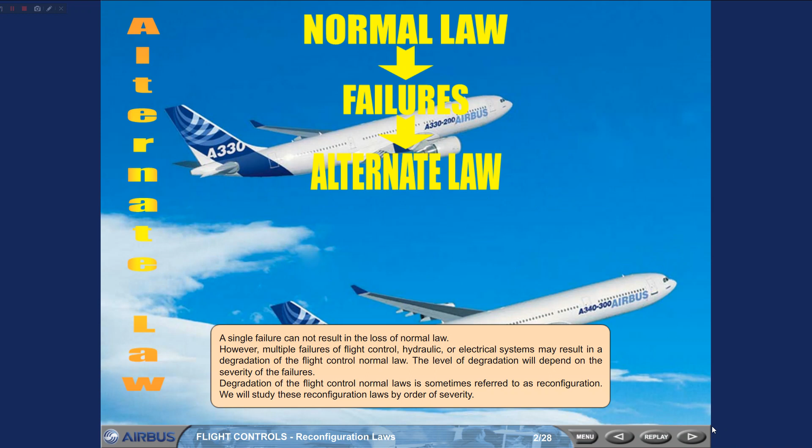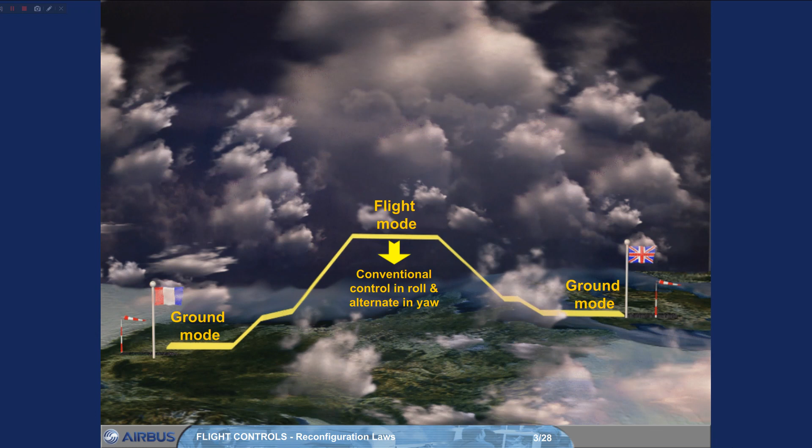In alternate law, ground mode is as in normal law. Flight mode pitch control load factor demand is as in normal law. Roll control is conventional, surface deflection is proportional to side stick deflection. Roll sensitivity is proportional to airspeed, feeling more sensitive. Yaw control turn coordination is lost, with damping available but limited authority.

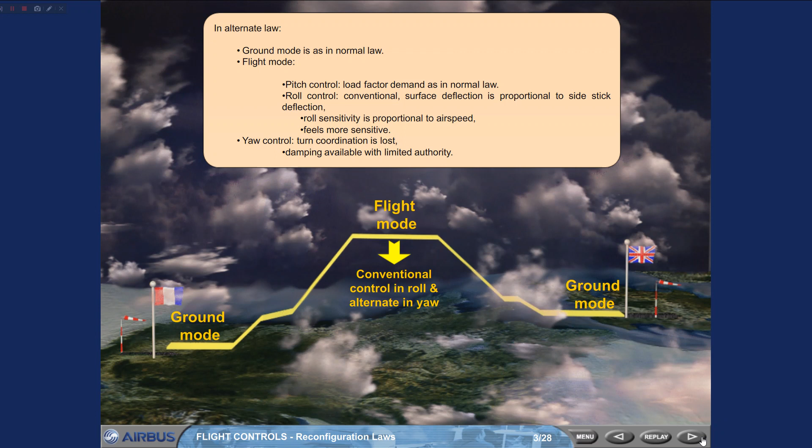Degradation to alternate law is indicated by the ECAM caution: flight control alternate law, protection lost. Under alternate law, most protections are lost. Some are replaced by stabilities. We will continue by studying the loss of protections.

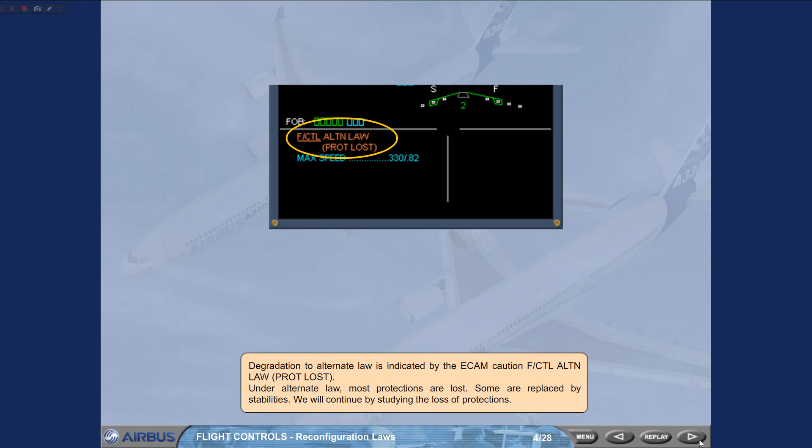Pitch attitude protection is lost, and the flight control computers will not limit the nose up or nose down pitch attitude. On the PFD, the green dashes, which mark the protection limits in normal law, are replaced by amber crosses.

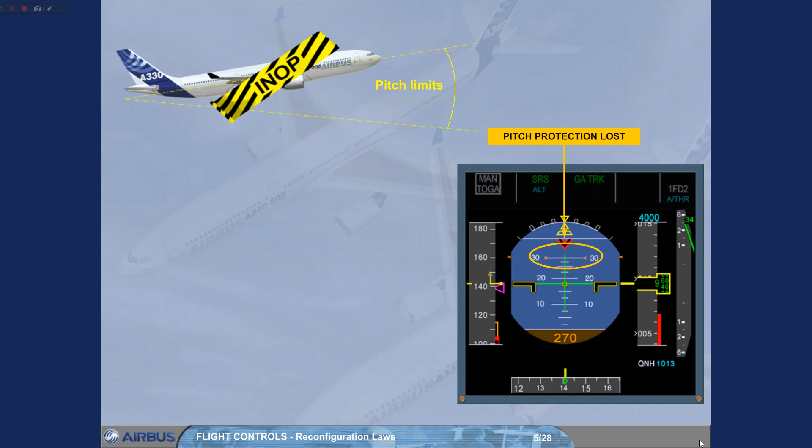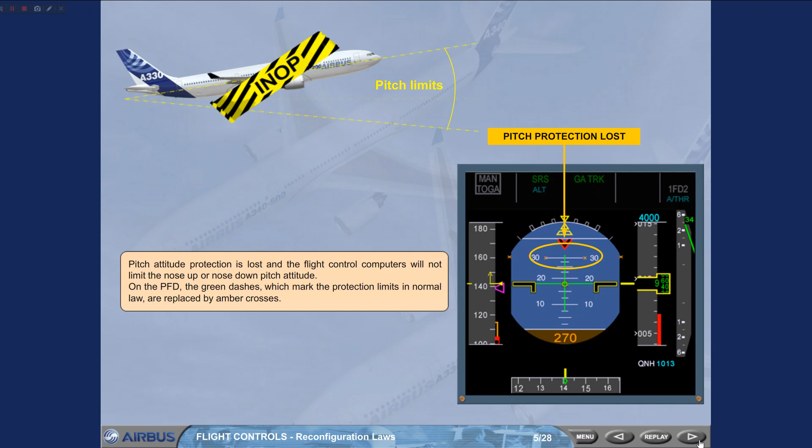Bank angle protection is lost. On the PFD, the green dashes are replaced by amber crosses. Note, if the bank angle exceeds 45 degrees, the autopilot will disconnect.

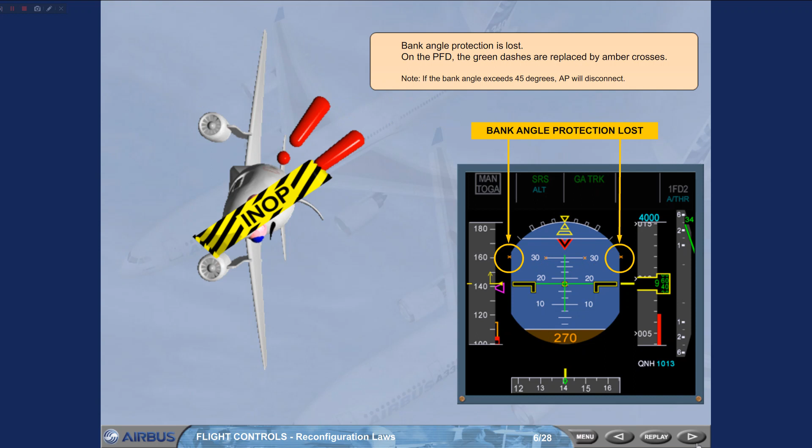The load factor limitation is similar to normal law. So we will go straight to the differences between normal and alternate law, high and low speed stability.

In alternate law, the high angle of attack protection is replaced by a low speed stability. V-alpha protection and V-alpha max are replaced by a stall warning speed, VSW, indicated by a red and black barber pole.

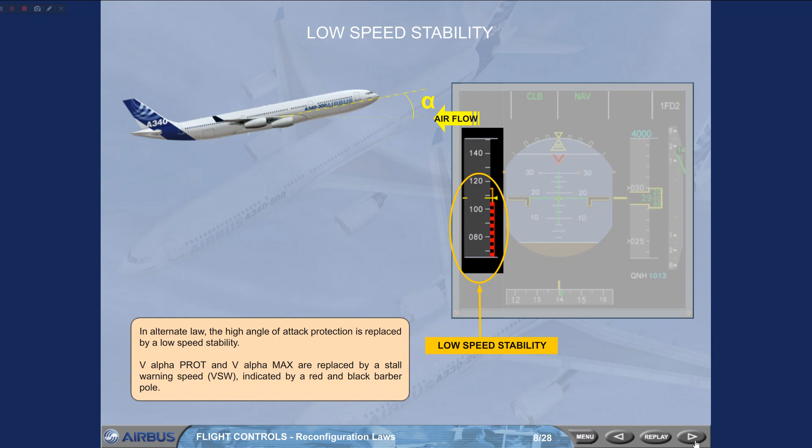As speed approaches VSW, a gentle progressive nose-down pitch input is introduced to lower the nose and prevent further speed loss. The pitch input can be overridden by pilot input on the side stick. Note, in case of failure of two ADRs, there is no low speed stability.

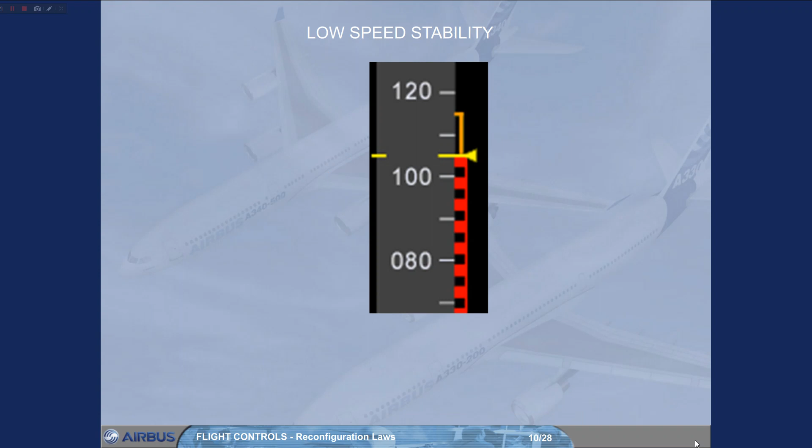At VSW, an aural stall warning is triggered. The aircraft will stall if the warning is ignored. Alpha floor protection is inoperative in alternate law.

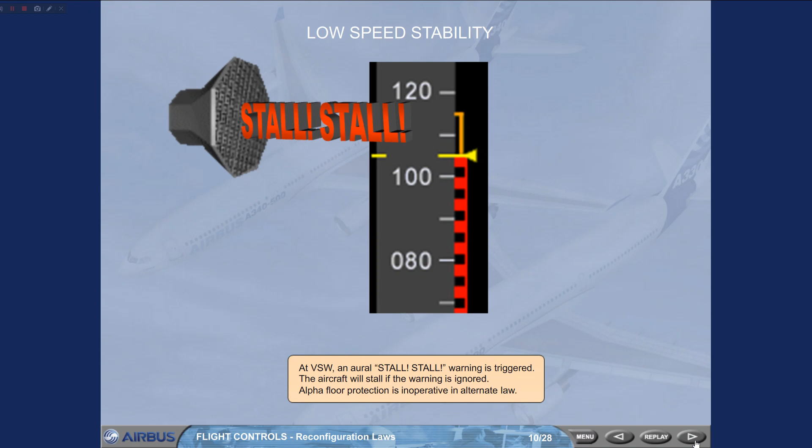In alternate law, high-speed stability replaces high-speed protection. The green dashes are replaced by amber dashes on the speed scale. Above VMO or MMO, a nose-up input is introduced to raise the nose and prevent further speed increase. This pitch tendency can be overridden by the pilots. Note, if the speed exceeds VMO/MMO, the autopilot will disconnect.

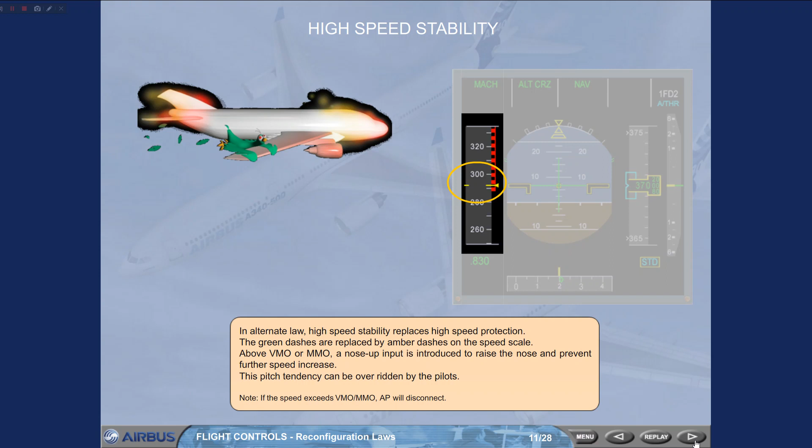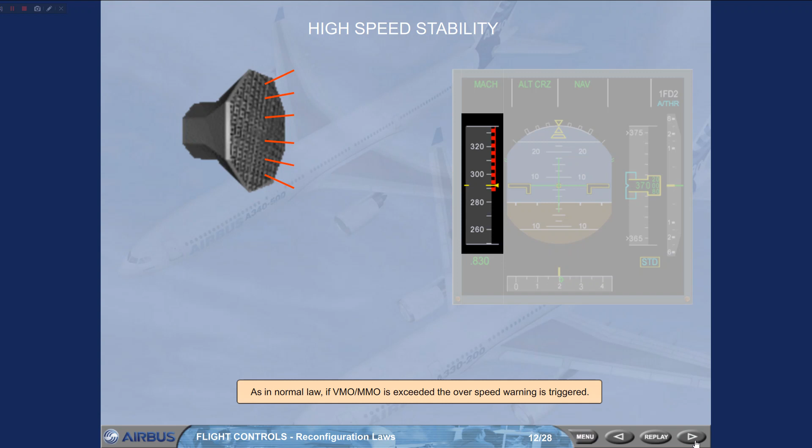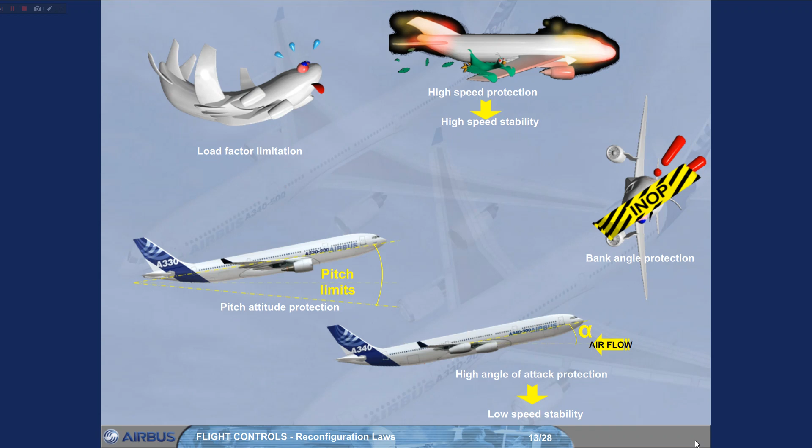As in normal law, if VMO/MMO is exceeded, the overspeed warning is triggered. Note that according to the failure, some stabilities may be lost. In this case, only the load factor limitation is provided. The high-speed and low-speed stabilities are lost. Stall and overspeed warnings are still operative.

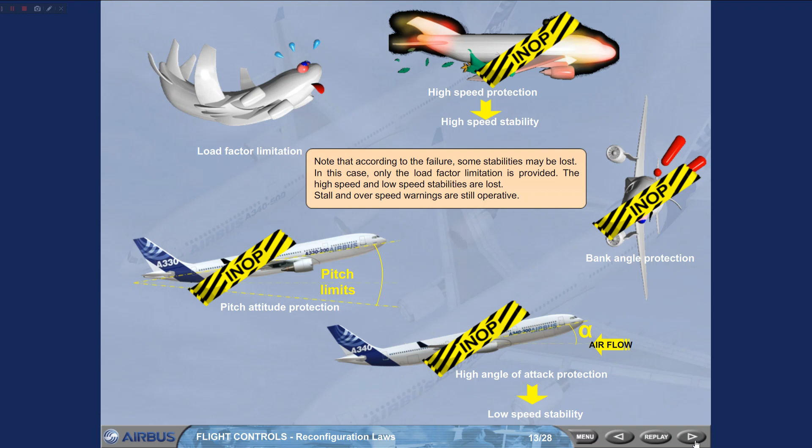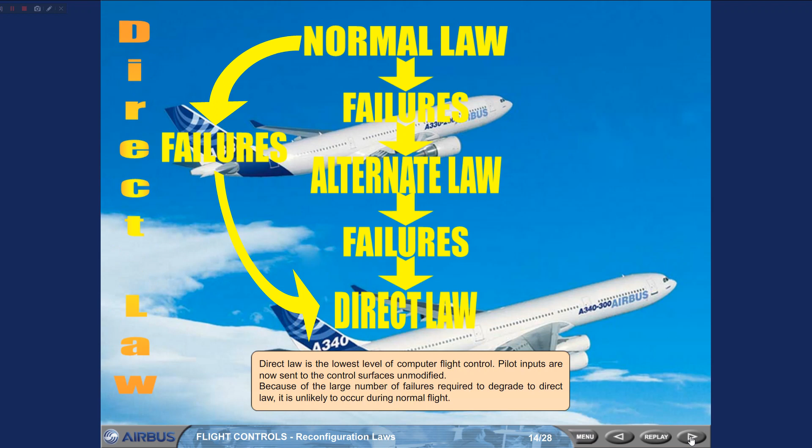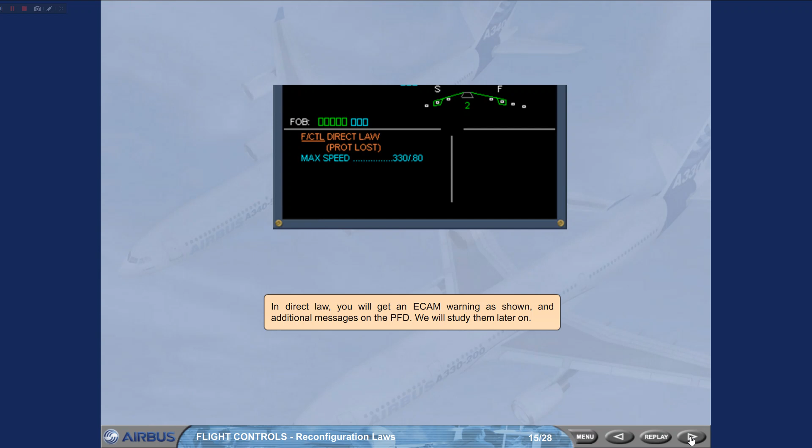In direct law, you will get an ECAM warning as shown, and additional messages on the PFD. We will study them later on. Direct law, as the name implies, gives a direct relationship between side stick movement and the deflections of all surfaces. The A330/A340 behaves like a conventional aircraft, and control sensitivity will depend on airspeed.

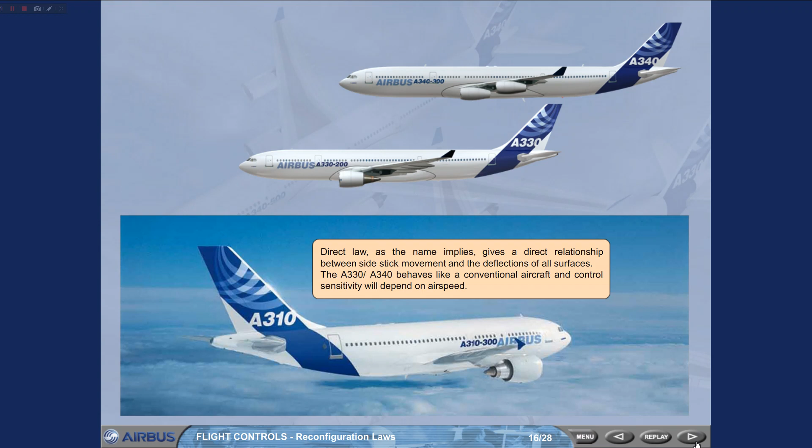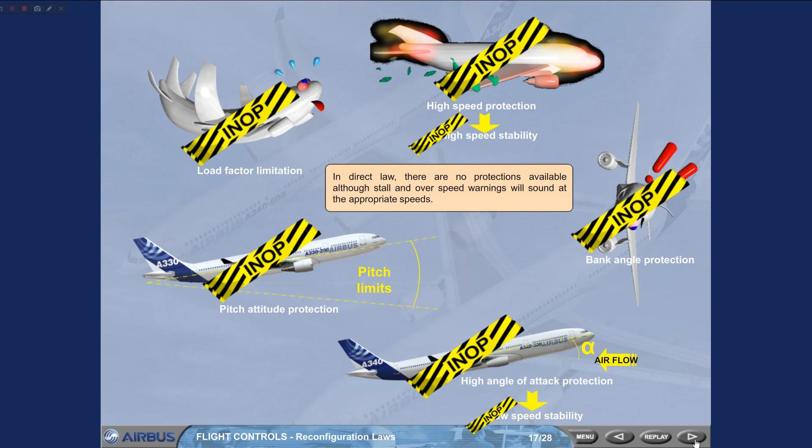In direct law, there are no protections available, although stall and overspeed warnings will sound at the appropriate speeds. Auto trim is not available. The crew must trim the aircraft manually. 'Use manual pitch trim' is indicated on the PFD.

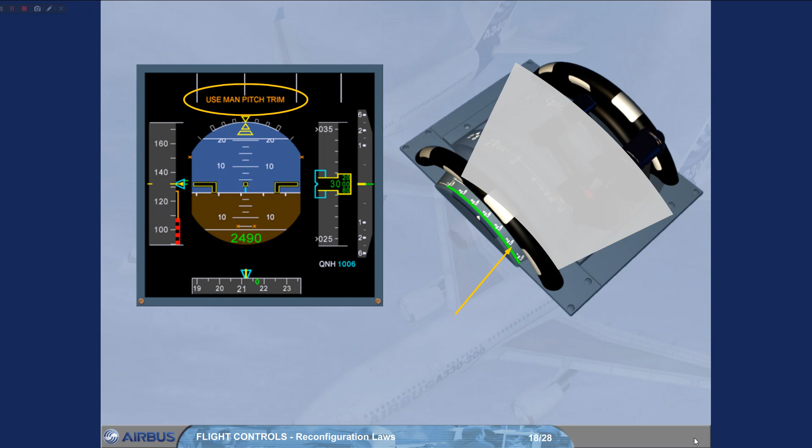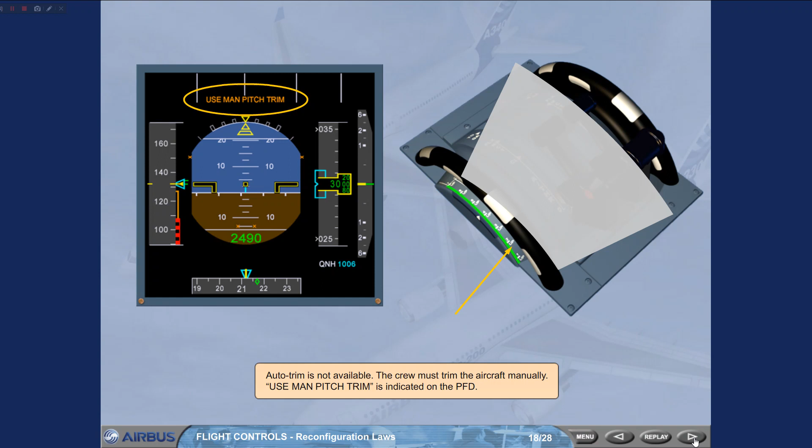Auto turn coordination and Dutch roll damping are also lost. All yaw control in direct law is through the rudder pedals.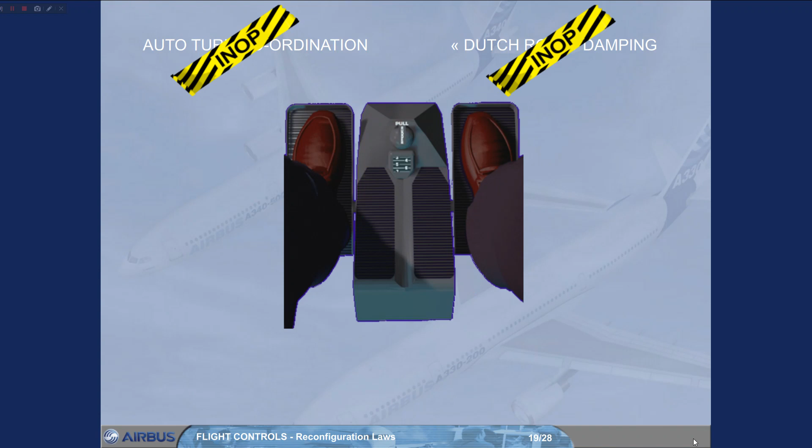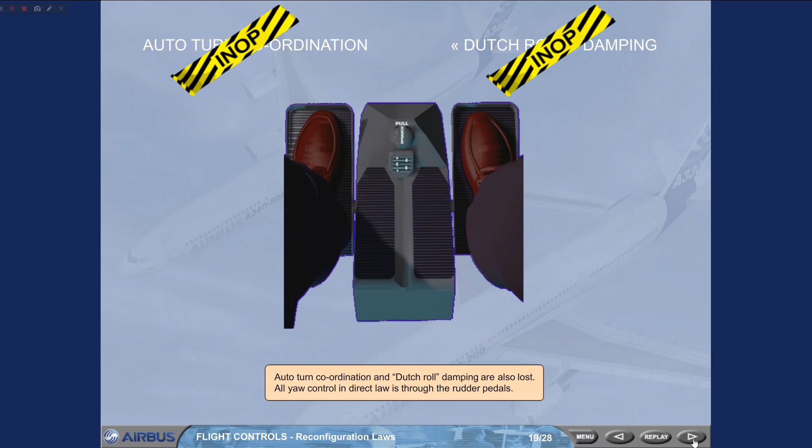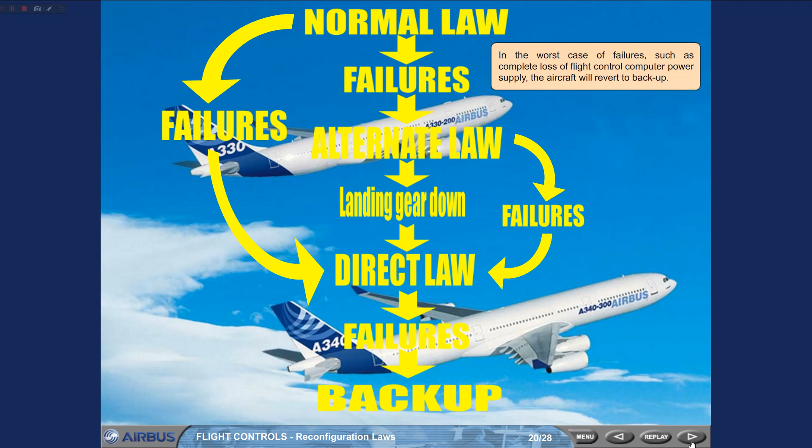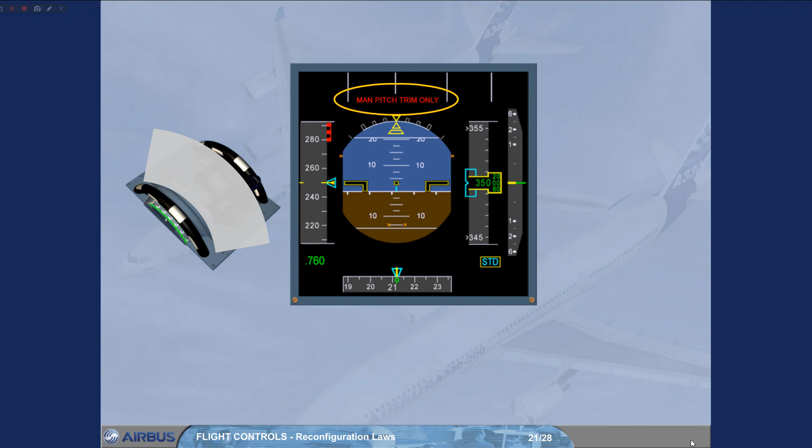In the worst case of failures, such as complete loss of flight control computer power supply, the aircraft will revert to backup. In this mode, the only method of control in pitch is manual adjustment of the THS using the pitch trim wheel, provided either blue or yellow hydraulic system is available. To indicate this, 'man pitch trim only' appears in red on the PFD.

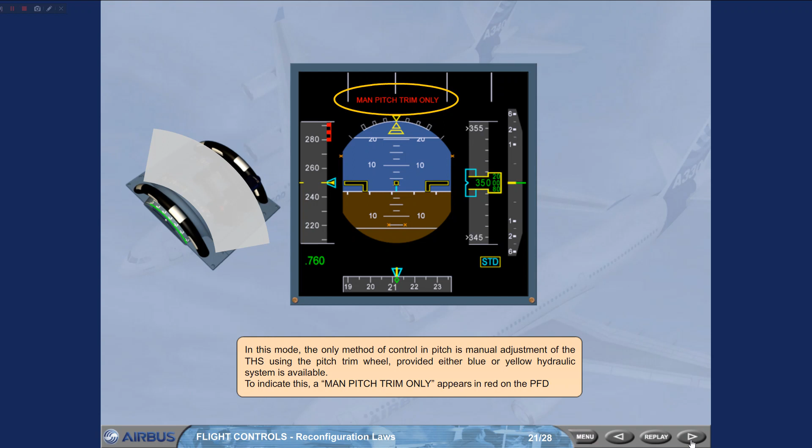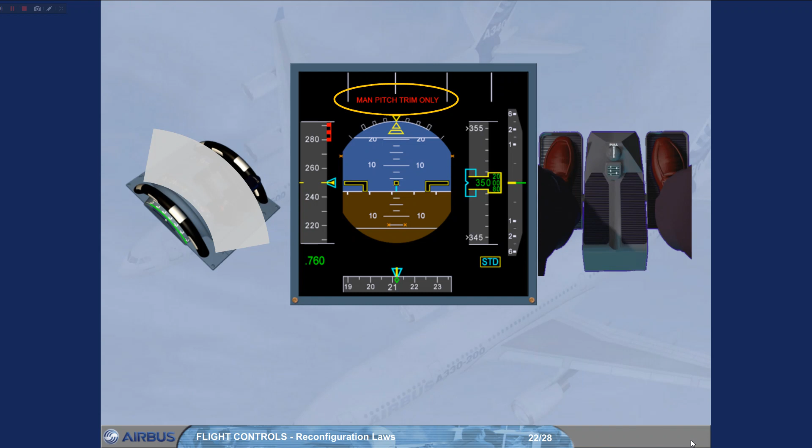Lateral control is achieved in this mode using the rudder pedals and the backup control module, BCM. The BCM provides yaw damping and direct rudder command. This computer includes its own electrical generator, supplied by either the blue or yellow hydraulic system.

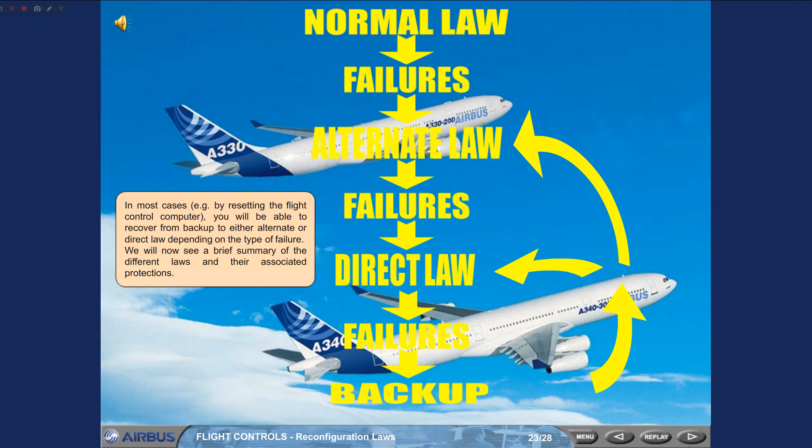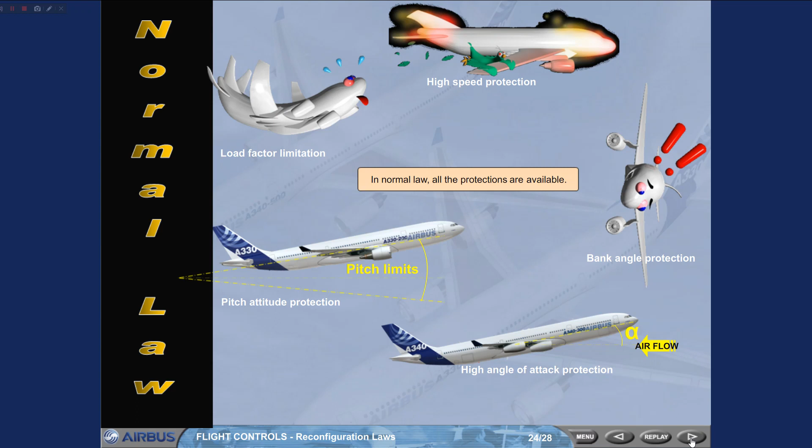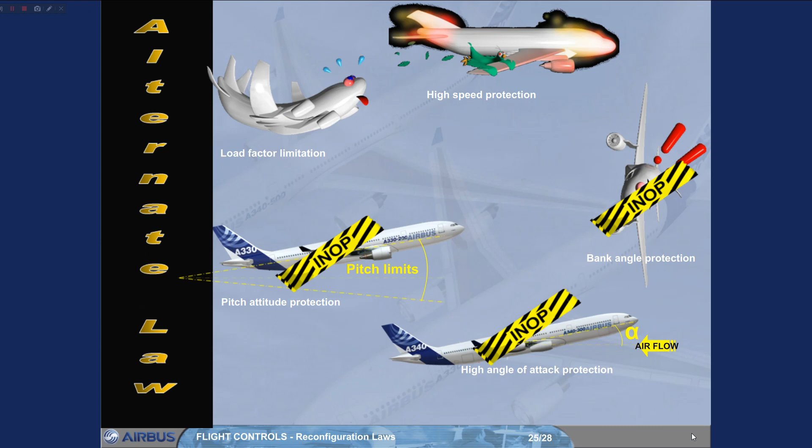In normal law, all the protections are available. In alternate law, the pitch attitude protection and the bank angle protection are lost. Load factor limitation is kept. High and low speed stabilities are introduced.

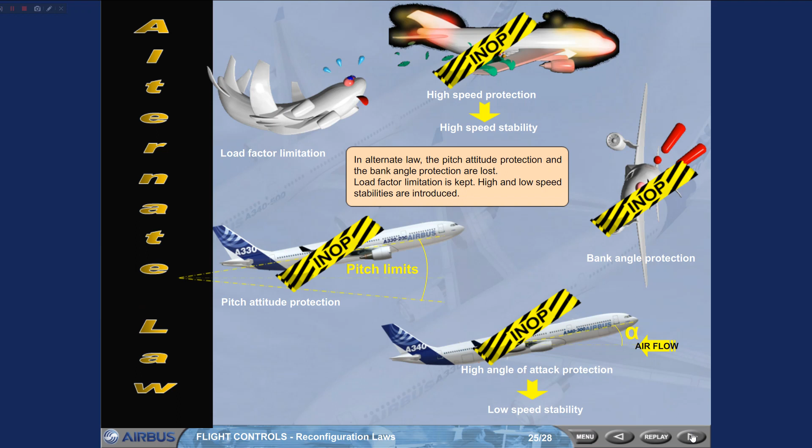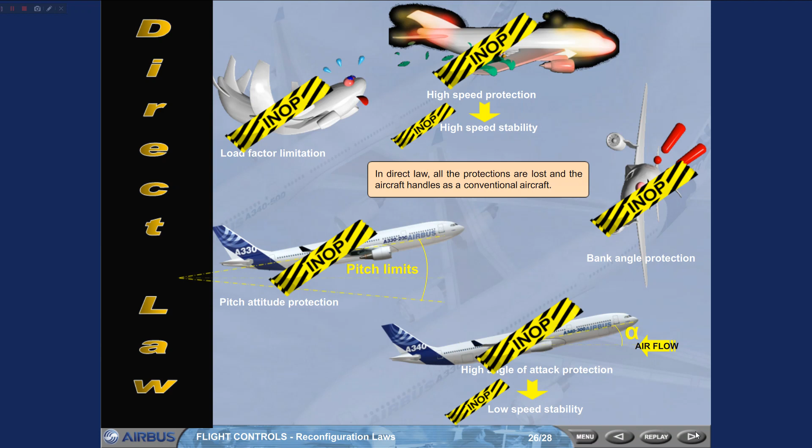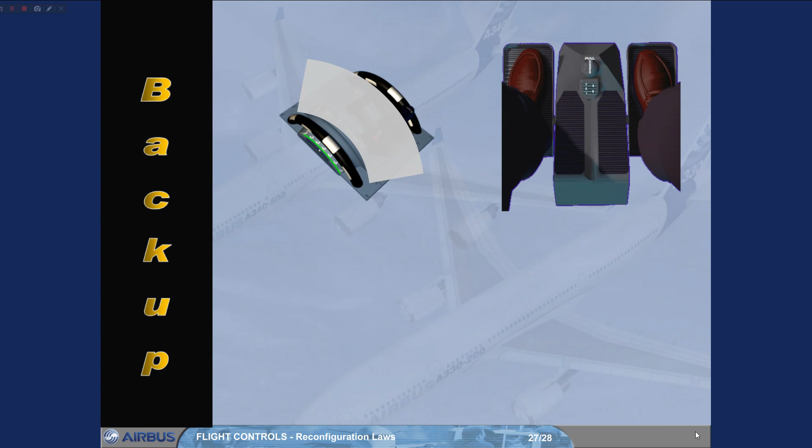In direct law, all the protections are lost, and the aircraft handles as a conventional aircraft. In backup, no protection exists. The pitch control is done via the pitch trim wheel, and the lateral control through the rudder pedals and the BCM, if the appropriate hydraulic systems are available.

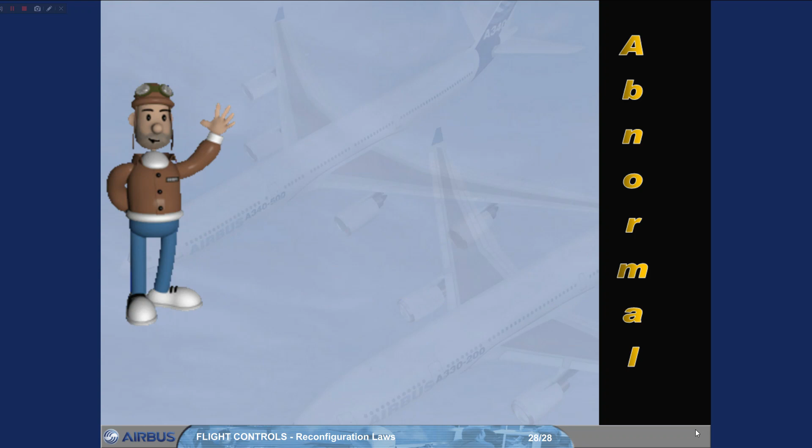You have seen all the different laws and protections. Maybe you wonder how to recover if extreme conditions cause the aircraft to leave the protected envelope. For example, you have been flipped over by very severe turbulence. Here is the answer: if the limits of normal laws are exceeded, abnormal attitude laws become active.

This is a safety feature to ensure that the flight control computers will never prevent the pilots from recovering from an abnormal in-flight attitude. The flight control laws operate in alternate law without protections and stabilities, except for load factor protection. After recovery, controls remain in alternate law without protections, but with auto trim.